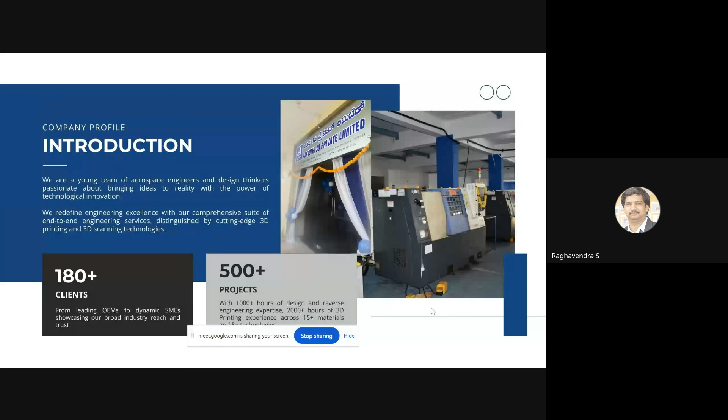But today I would like to give a brief on polymer matrix composites. Before proceeding, I would like to start with a small introduction about our venture. We are basically a team of aerospace engineers, and I started this company when I was doing my MTech by research at NITK Surathkal. This was in 2018. I started this as a proprietorship concern, and after a year, once my project was finished, I incorporated it as a private limited company.

So what we do here at Aakruthi3D is provide comprehensive end-to-end engineering services for industries. Right from conceptual design till production, we have a dedicated team of resources as well as capabilities. We have dedicated design engineers, prototyping engineers, as well as in-house 3D printers and 3D scanners. Recently we established our subsidiary company, which is the manufacturing arm of our company, where we do even conventional machining - precision CNC turning and milling. Currently we are located at Peenya industrial area.

Our client base is more than 180 plus, which includes Mercedes. We are a registered vendor for Mercedes Benz Group, SKF, ITC, and Magellan Aerospace, Unimec Aerospace, just to name a few leading OEMs as well as tier one companies. Our team has successfully completed more than 500 projects, with more than 1,000 hours of design and reverse engineering expertise. We are also working on some unique use cases in aerospace, oil and gas, like non-destructive testing.

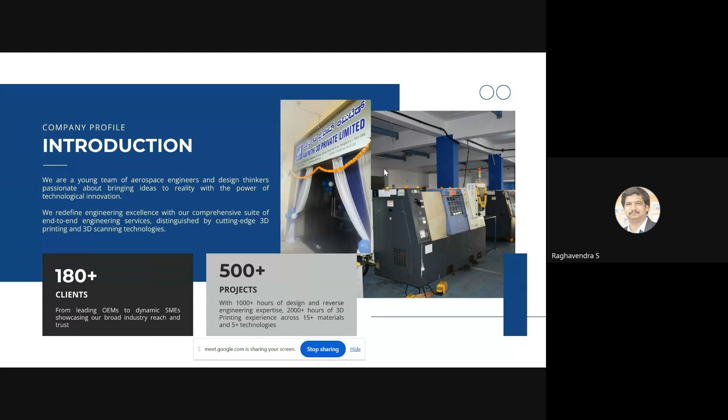Some of our key products and services, as I told you, span from conceptual design till manufacturing, we have the capabilities. Our vision is to become India's own tech giant by developing and commercializing critical indigenous technologies in the aerospace and defense sector.

I can tell you some of the R&D projects we are currently working on. We are developing a metrology grade 3D scanning technology, an indigenous 3D sand printing technology, and a micro gas turbine technology. These are three projects in our portfolio where we are putting dedicated efforts.

We have applied to government grants, and recently we have raised equity funding investment also from angel investors. So this is about us, what our team is working on, and how I have been instrumental in doing these things.

Coming to today's presentation, I'd like to give a brief roadmap of what we are going to discuss. We'll start with the introduction, then have an overview of different 3D printing technologies. Then we'll go deeper into polymer matrix composites, their applications, future research prospects and challenges, and how I'd like to address this session.

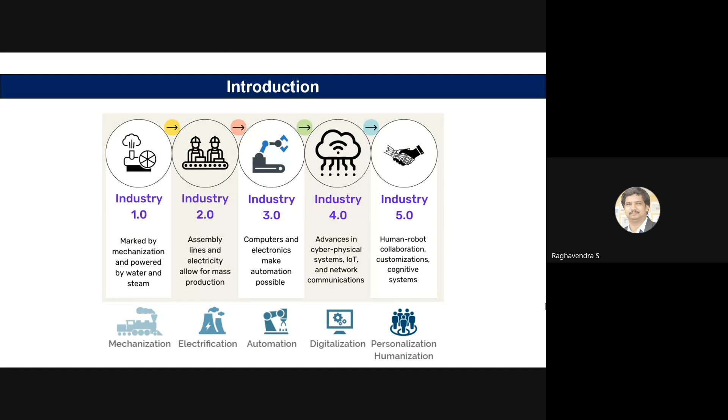So in the context of Industry 5.0, composite material will also play an important role.

The second technique is jetting, material or binder jetting. That basically serves a range of materials like ceramic, metal, plastic, wax, and sand.

Then you have powder bed fusion, which is majorly used for metal and ceramic, but it can be used for plastic also, like SLS (selective laser sintering), SLM (selective laser melting), and EBM.

And there are deposition techniques, the regular extrusion techniques, called fused deposition modeling (FDM), or its more open source name, triple F, fused filament fabrication. For live cells there is 3D bioprinting, and for paper there is sheet lamination.

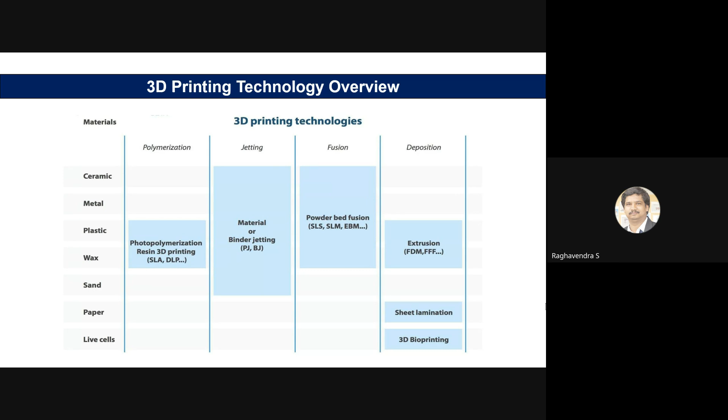So this is the technology landscape, you can call it. For different compatible materials, there are different technologies.

A brief overview - I would like to give some 3 or 4 technologies in today's session, where in the context of composite material, we'll see what are its advantages or disadvantages.

So FDM, as I told you, is now available in every nook and corner of the market. It is the most popular technique and the cheapest one, and it builds layer on layer by pouring melted filament from the extruder. You can see in the representation figure there is a nozzle, and thermoplastic filament like PLA or ABS is melted and deposited layer by layer, with movement in the build platform or the nozzle itself. That is how your 3D object is created.

So here, how do you control the quality of the parts? There are parameters like layer thickness, grid pattern, printing orientation, raster width, raster angle, and air gap. These are some of the parameters which decide the quality of the final 3D printed part.

So even after optimizing all these parameters, it may not give you a functionally working component. That is one disadvantage of FDM. Also, due to the thermal expansion of the polymer itself, whatever final printed part we are getting will have distortion in it. And based on the layer thickness, there is even compromise in surface finish.

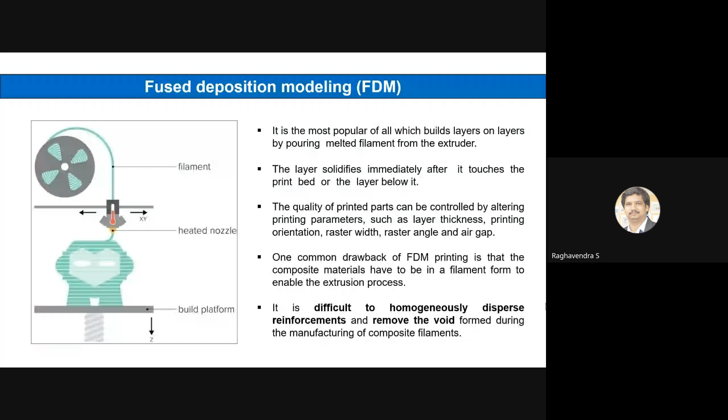So next we'll see stereolithography. In this technology, basically we use resin materials. Why this technology is popular is there is a great range of materials because of its material versatility. There are engineering grade resins like clear resin, the standard resin, durable resin, or high temperature resin, elastic resin. And if you go to medical, there are dental resins or biocompatible resins. So due to its complete range of printable materials, that material versatility, SLA is popular.

And one more thing is its surface finish. You will get the same injection molding finish in SLA as the printed condition itself. So that is the advantage of SLA.

So here what we need to understand is the chemical reactions. In FDM, we saw it is like a thermomechanical process. Whatever heating and melting process is there, if that physics is followed, you can understand the internal structure. But here, we need to understand the chemical reactions during polymerization to control the quality of the final parts.

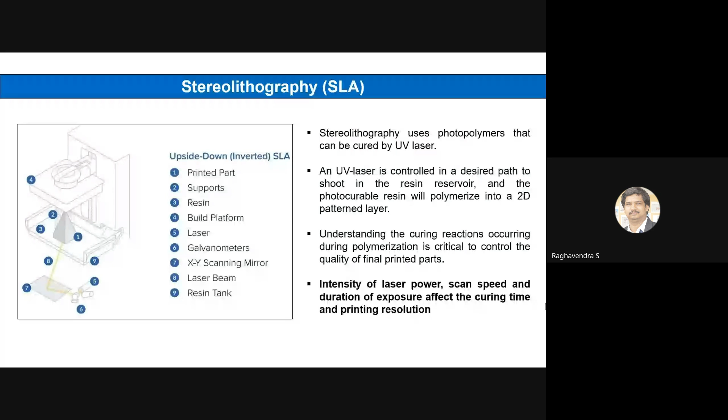Here, how we can create a composite material is we can add directly to the resin itself, like photo initiators and UV absorbers, to control that polymerization reaction, that curing reaction as I told.

So the main advantage is you'll be able to print parts with very high resolution, and since this is a nozzle-free technique, there is no problem of nozzle clogging. So this is the advantage of SLA.

Despite these advantages, there is high cost. Just to give an example of the current Formlabs ecosystem we are using, the resin itself will cost 24-25,000 per liter. So whatever trial and error you want to do, apart from your functional resin, you need to maintain the reservoir, even that should be filled. So to conduct an experiment, it's like two times the consumables you should be having. That is how expensive the system is.

And one more disadvantage is there might be possible cytotoxicity. There are some poisonous residues if it is not cured properly. So that is also one major concern.

And even in terms of handling, with FDM, since it is a mechanical process itself, you can easily operate it - there might only be melting or nozzle issues. So all those things can be handled easily. But here, since we are working with resin and chemical reactions, you need to be very careful while using these resins or different post-processing techniques. So that is the disadvantage of SLA.

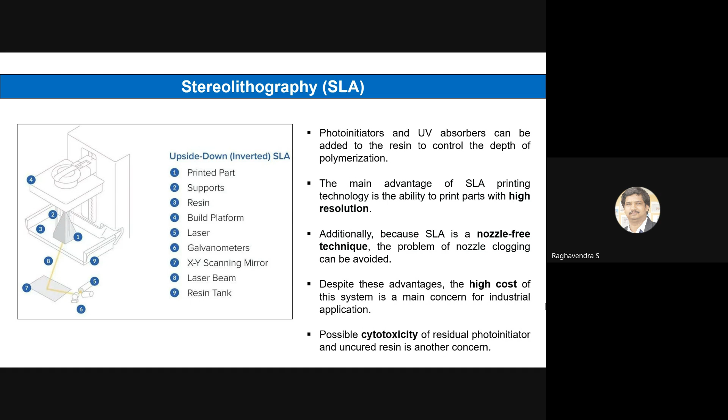The next technique is SLS, that is selective laser sintering. Here the form of material we are using is powder based processing technique, same layer by layer process only. The grain size is around 20 to 30 micron grain size powder we are using.

This high power laser beam and the powder interact in a controlled environment, which may be like an inert gas environment, and the powder fusion takes place for each layer. There is a roller which basically spreads each layer of the powdered material, and correspondingly the high power laser beam is incident on the part.

How you do the slicing for FDM, similarly here also that slicing happens. Wherever your part is there, that region itself the fusion takes place, and the remaining won't take place. This complete piston operated platform goes on lowering for every step until your final product is ready.

The major advantage of this technique is that it is a support free technique. In FDM, if you have worked, you might be fully troubled with support removal. Wherever some feature is mixed with support, it is very difficult to get that surface finish. Similarly in SLA also, there will be minute marks. Wherever you remove that support structure, that mark will be permanent. You have to paint it or do some post processing to get rid of that.

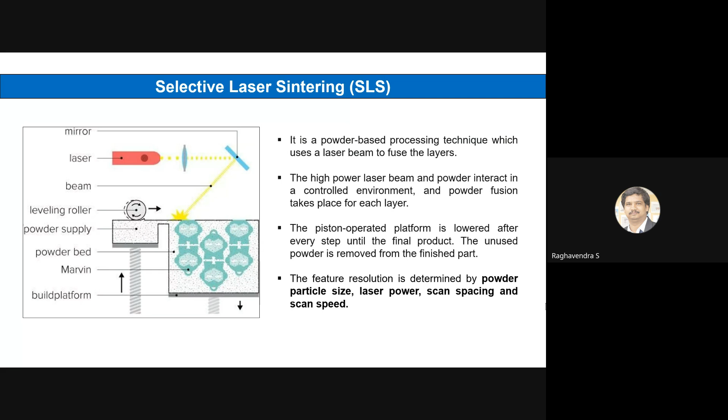The main advantages are high resolution and excellent quality. As I told you, it's a support free technique. Here the unbounded powder itself will act like a support.

Some drawbacks are that this is a time consuming process. Again, it is a very costly process. As I told you, in SLA you need to maintain a reservoir of your complete resin, so that is twice the consumables. But here, the complete tank has to be maintained, with powder present, so that is still costlier than SLA.

And even after doing all these things, there are porosity issues. Even today, if you search, there is research happening on how to reduce this porosity, how to reduce crack formation, how to make the grain structure very fine. All this research is still underway, and we have not yet got standardized parameters, or optimal parameters for each material.

It's different in SLA and FDM. There, the machine maker itself gives the guidelines, like what should be the layer thickness, or what should be your infill density. But in powder bed fusion, it is not like that. All the printing parameters you only have to arrive at by yourself.

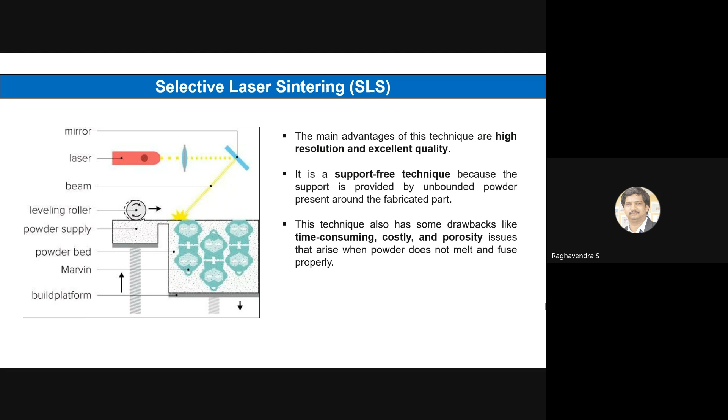Even NASA is working on this, ISRO is working on this. If you can get a very printable, high performance super alloy, that's a game changer for all industries. Maybe what SpaceX achieves today in space, or Apple, or any of these giant companies, it is because of these printable high performance super alloys only. So I think there is a great scope for research in this area.

So now let's just compare the three techniques we discussed: what are their advantages and disadvantages.

By FDM, it's a low cost consumer machine, but the feature details show there is low accuracy, limited design compatibility, and if you want semi-functional components, there is high cost involved and high performance materials are needed. So it is best suited for low cost rapid prototyping and basic proof of concept models, with only select end-use parts requiring high-end industrial machines and materials. The compatible materials are standard thermoplastics like ABS, PLA, and various blends on consumer level machines.

In SLA, there is great value because of its high accuracy, smooth surface finish, and a range of functional materials. One disadvantage is it is sensitive to long exposure to UV light. Some applications are functional prototyping like patterns, molds, tooling, dental applications, jewelry prototyping, and casting. As mentioned earlier, there are varieties of resins available: engineering grade resins, medical grade resins, casting resins, biocompatible resins, and the list goes on.

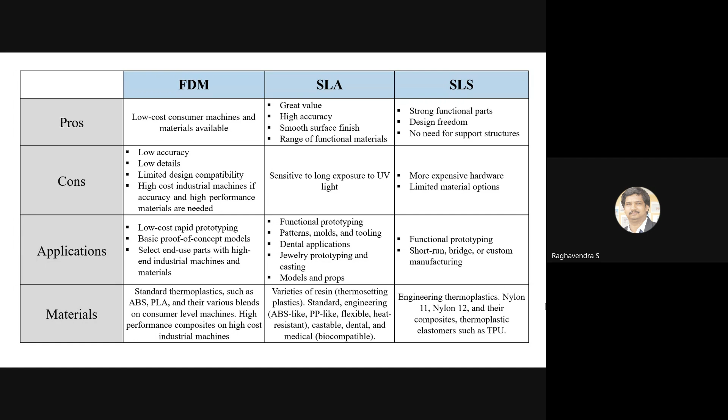One more technology I want to briefly introduce is relevant to composite printing technologies, like 3D plotting or direct write technique. This is not a very popular technology, but for composites, whoever has worked with them might have heard about it. It uses the same extrusion principle, where you're extruding a viscous material from a pressurized syringe. This is most popularly used in biocompatible material printing.

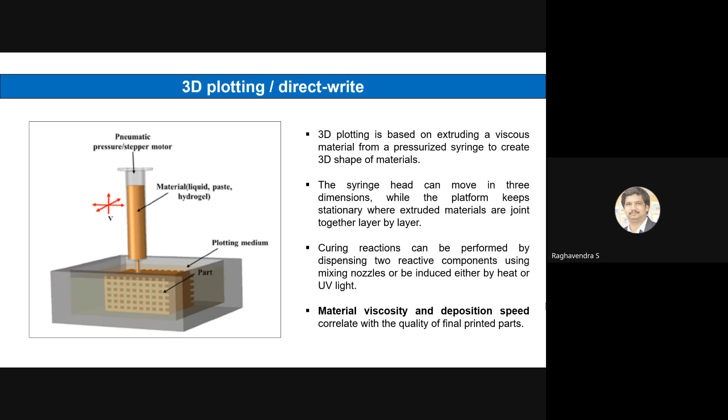You can see in the figure there is a syringe head that can move in 3 dimensions, whereas the platform stays stationary, and extruded materials are joined together layer by layer. Here too, chemical reactions or curing reactions happen, which can be performed by dispensing reactive components using mixing nozzles, or induced by heat or UV light. The quality of the final printed parts is decided by two parameters: material viscosity and deposition speed.

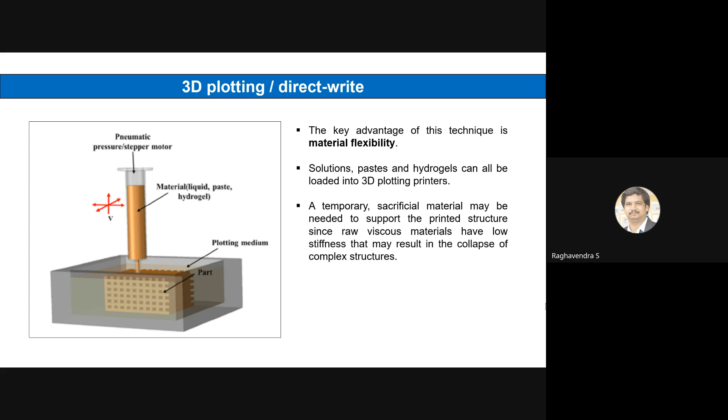One advantage here is material flexibility in terms of composites you can create. Solutions, pastes, and hydrogels can all be loaded into these 3D plotting printers. In today's context, this is quite relevant.

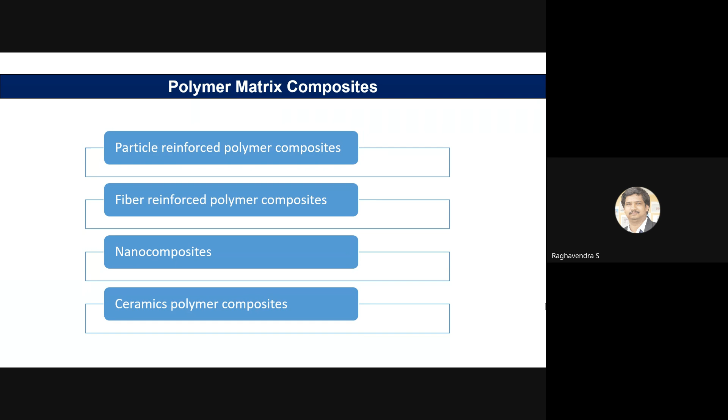Now we'll go a little deeper into polymer matrix composites. I have listed some of the most popular techniques: particle reinforcement, fiber reinforcement, nanomaterial reinforcement, and ceramic polymer composites. We'll go through some of the latest research happening in these 4 areas, look at applications, and try to figure out future trends and what we can focus our research on.

The main reason we prepare these composites is we want some enhancement in properties, like mechanical, electrical, or thermal property, as per a specific application—that is our end goal. With that in mind, what particles can we reinforce, and whether it is 3D printable or not.

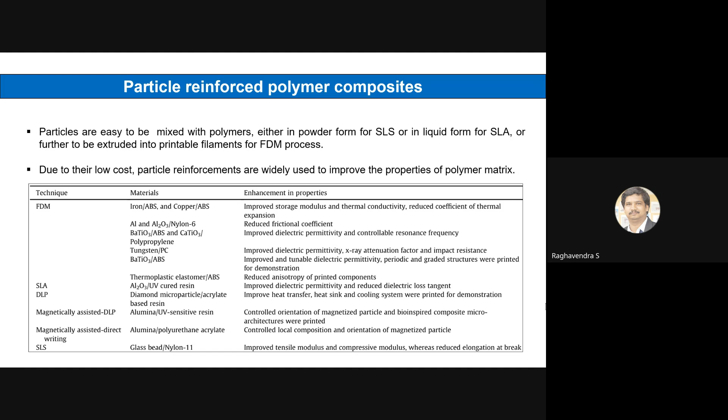Similarly in SLA, as I told you, directly to the resin itself you can add some particles like aluminum oxide slash UV cured resin. Here also there is improvement in dielectric permittivity, and similar for DLP. I'll show some case examples after this where you'll still be able to understand this. There are some magnetically assisted DLP processes developed, which we'll look at in the coming slides, showing how you can control the alignment of the particles you are reinforcing so that you get a highly isotropic part. That is the focus we want to achieve.

So this is one example. One of the researchers, I think in 2016, did this study: they 3D printed a heat sink using the first picture A, acrylate resin, and the second one B, a 30% weight by volume composite material with micro diamond particles added to acrylate resin. What enhancement did they get? You can see in pictures C and D. If you heat both components at the same temperature for 10 minutes at 100 degrees Celsius, you can see the difference - 75, 57, 44 degrees, that gradient is there. But with the composite material, 82, 64 and 52 degrees Celsius - there is improved heat transfer rate by addition of diamond particles. This is one classic example.

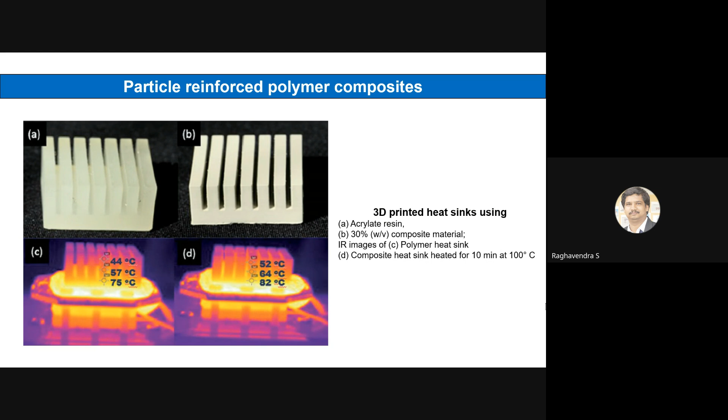This is one more example, where barium titanate is infused with ABS polymer, and you can see the relative permittivity change, that is epsilon prime. With the normal structure it was 2.57, and by adding 50% barium titanate it has gone to 4.95, that is almost double. If you further explore the study and increase this percentage to 70%, the property enhancement is almost 240%. So the property enhancement we are telling you about is so significant - that is why this area is so promising.

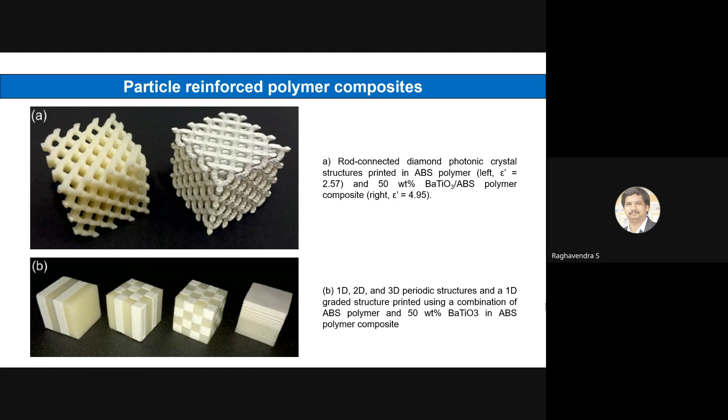And in example B, you can see they have generated different structures like 1D, 2D, 3D periodic structures using the same composition.

So this was the technique I was talking about in the previous slide, where one of the researchers has developed this novel 3D printing platform. It is a magnetically assisted 3D printing platform.

Left side picture, that's picture A, where you can see you can create heterogeneous composites here. Some of the parts are mentioned here. You can see that green colored one, those are the dispensers, and the blue big one looks like a nozzle, big nozzle, that's a mixing unit. Third one, the bed, that's a movable head and table. Fourth is the magnet, and fifth is the curing unit.

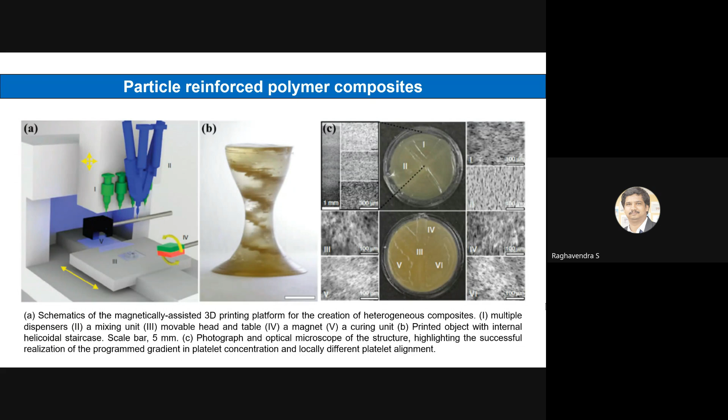You can see a printed object with the internal helicoidal staircase, and we can see some of its optical microscope pictures as well. The main thing to observe here is void formation, how much we are able to reduce void formation using this magnetic field, because during the 3D printing process you apply a magnetic field so that whatever particles you are adding get aligned in the direction achieved. So that is one novel feature of this.

So with this, I think we can go to fiber reinforcement. Earlier we discussed particle reinforcement. This is also one more method where you can significantly enhance the properties of PMCs.

Common 3D printing technologies in fiber reinforcement are FDM and direct write, that's like the 3D plotter we saw, which is relevant for this fiber reinforcement. Powder based techniques are not ideal for creating fiber reinforced materials, because you cannot create a smooth layer of powder and fiber mixture, so that's difficult. That's why powder based technologies are ruled out. Only FDM and direct write techniques are there.

In FDM processing, the pellets and fibers are first mixed in a blender and then delivered to the extruder to be fabricated into filaments. You can have a separate second extrusion process as well, just to make sure there is homogeneous distribution of fibers.

In direct writing processing, there is a polymer paste and the fibers, they are mixed first and then directly extruded. So the technique is like this.

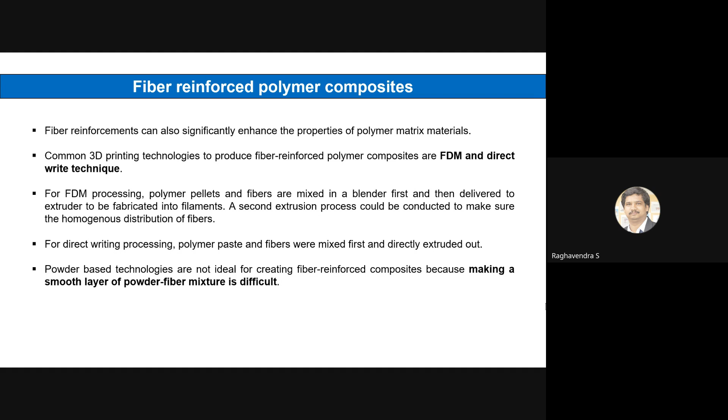Here you can see there is enhancement of properties. If you are aware of commercial printers, I'd like to give a small overview here. There is Markforged printer, which can print materials like Onyx, whose properties are equivalent to that of aluminum itself. That's a composite material which is very lightweight, but which will give strength as that of an aluminum alloy. Such commercial based printers are able to achieve this.

But here the challenge is short fiber versus continuous fiber. Most of the research is focused on short fibers. For example, in the FDM technique, short glass fiber is added to ABS, and short carbon fiber is added to ABS. You can see the different loading percentages and how much corresponding improvement there is. Almost 194% is the maximum improvement you can see. And even as low as 5% loading, you are able to get some 24% improvement.

Similarly for direct write, short carbon fiber and silicon carbide whisker with epoxy, with 35% weight, 127% improvement is there. This is one more comparison showing how different it is in terms of short fiber versus continuous carbon fiber. If you see the last column, continuous carbon fiber slash nylon and continuous carbon fiber slash PLA, just 34.5% volume and 6.6% volume, you can see the improvement is 446% and 335%. That much improvement we are able to get with continuous carbon fiber.

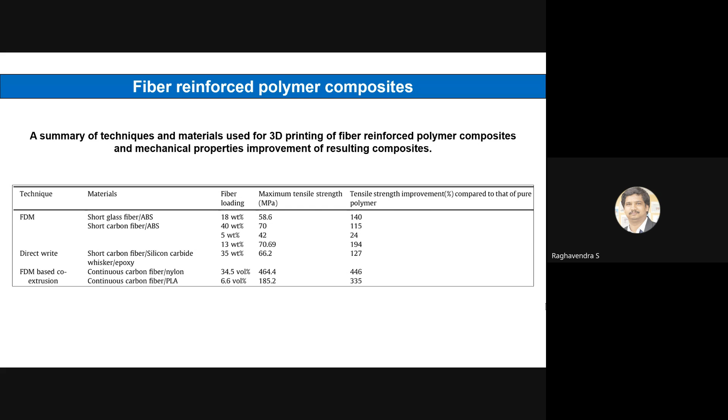I want to highlight one more point. We saw that continuous carbon fiber has almost 300-400% improvement. But even then, you will be knowing the rule of mixture we use for composite material. Whatever theoretical value you get by rule of mixture, it is not matching with this 446% or 335%. It is still lower than that theoretical value itself. So there is a difference between experimental and theoretical values.

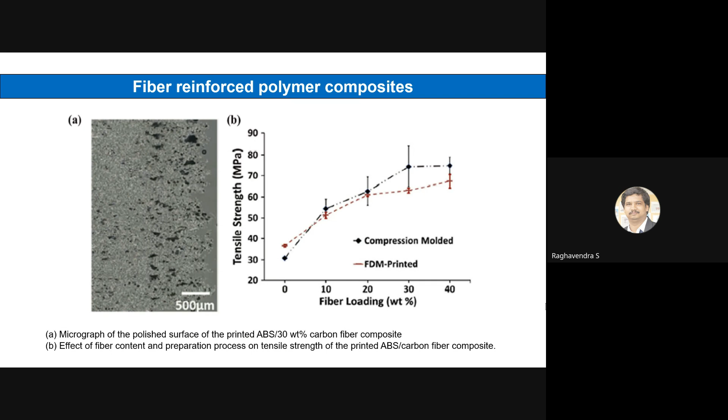Here is one example where on the left hand side you can see the micrograph of the polished surface. What we need to observe is the void formation. If I quantify this, maybe around 10 to 20% void formation is there. But if you look at its performance, tensile strength versus fiber loading, it is compared with one more established technique, compression molding, and FDM 3D printing. Both are compared, and you can see the properties are almost matching. So there is void formation, but still you are able to match compression molding. How is it possible? It is only because when you are doing the 3D printing itself, all those fibers get aligned in your loading direction. That is the basic reason why you are able to see the values closely matching FDM 3D printing and compression molding.

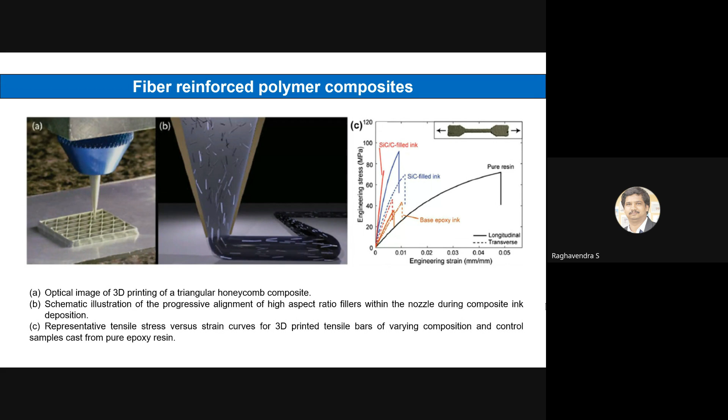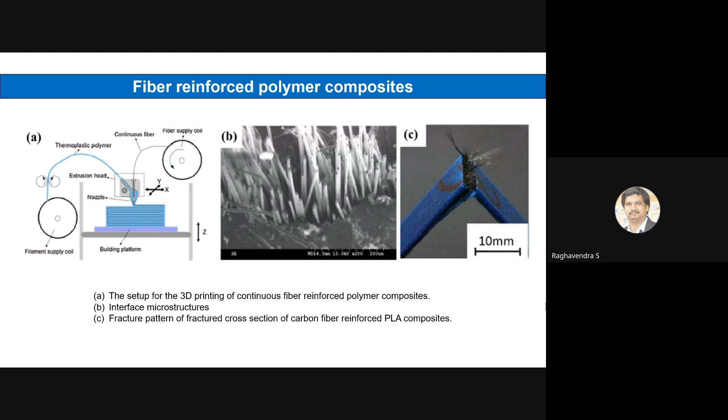Now I think we can go to nanocomposites. Here the difference is, we saw particle and fiber, now we are adding nanomaterials like carbon nanotube, graphene, graphite, ceramic, and metal nanoparticles. Here the challenge is, if you study graphene, it's a self-lubricating material, so how do you combine it with your regular polymers and achieve homogeneous dispersion? That's a challenge. Even my work is concentrated on this itself. We are trying to add graphene and graphene oxide with the Invar composite, using a ball milling process to achieve that. But still, how do you ensure homogeneous dispersion, and how do you make that 3D printable? Those are the areas where we are working. Here the main aim is to create high performance functional composites or high performance super alloys.

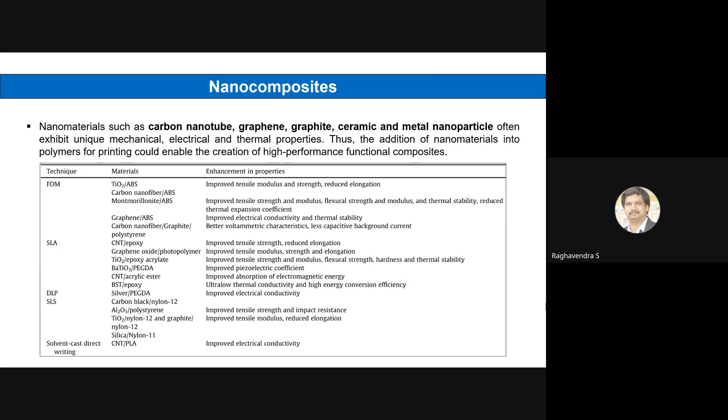Similarly in terms of SLA, you can see some photopolymer added with CNT, graphene oxide, and acrylic ester and CNT, where you can get improved piezoelectric coefficient, tensile strength, modulus, and flexural strength. Similarly in DLP and SLS.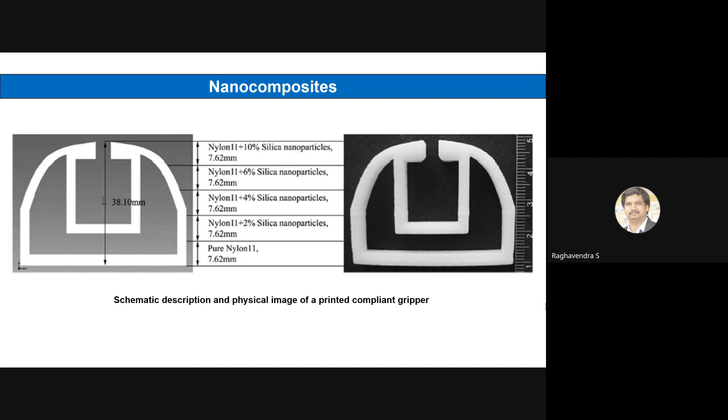The last example is ceramic polymer composites. Here also, there are many ceramic particles we can add, compatible with FDM and SLA techniques.

Or there are some special technologies developed specifically for ceramic polymer composites. Since I don't have much exposure in ceramics, I thought I'll just give this comparison.

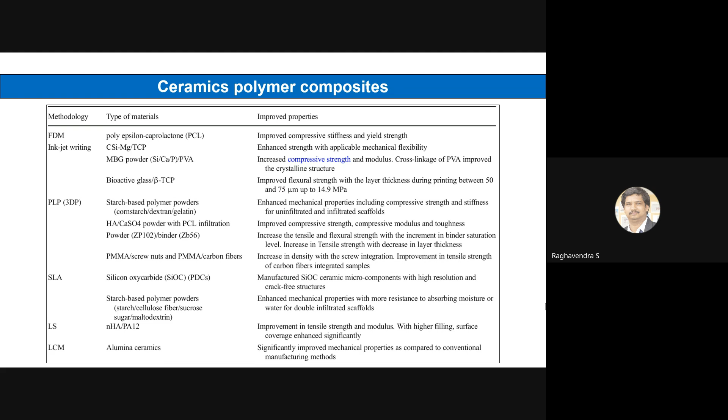Now we can go to some of the applications of PMCs, where it can actually benefit. This is where it gets interesting.

Whatever we are seeing now, maybe in movies, like the fictional part of 3D printing, you can print a complete human body itself, or you can print cells, you can print textures like tissues. All this comes in this application part.

Or you can print the complete drone electronics. Imagine now you are printing the drone body, but the electronics also, if you can print it during that process itself - that's structural electronics I'm talking about.

Then I think there's no limit actually, so much potential it holds. So those applications I think we can see in these slides.

The first thing is aerospace and automotive, as I was telling about the drone case itself. Here you can see two profiles: a blade profile and a propeller airfoil profile, using glass fiber composite and carbon fiber composite.

Just a cross section to establish the feasibility of printing, you can say. You can see in this that C, D, G, and H.

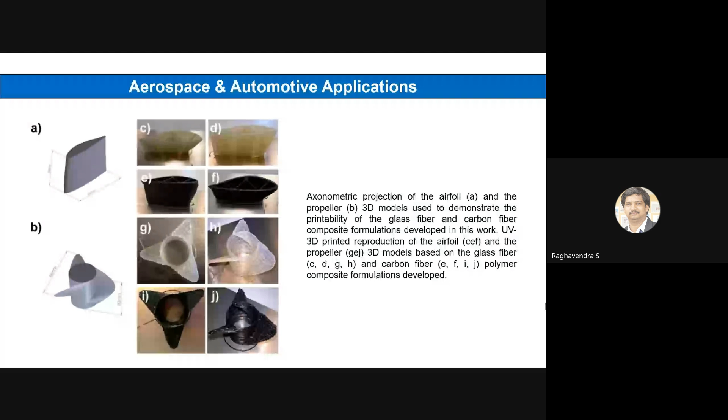Coming to biomedical applications, there are naturally derived polymers that are standard used, like gelatin, alginate, and collagen. There are also synthetic polymers, like PEG, that is polyethylene glycol, and PLGA, that is polylactic co-glycolic acid, and PVA, that is polyvinyl alcohol.

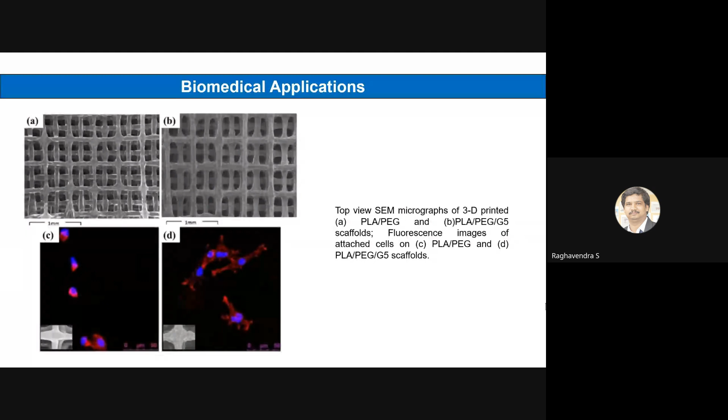But in biofabrication, you can see the internal microstructure, how uniform or crystalline the structure we are able to obtain using this. For PLA/PEG and PLA/PEG/G5 scaffolds, you can see the fluorescence images. The scaffold functionality requires us to replicate the inside microstructure. Once that is done, the functionality is taken care of. That is what we are trying to look at here.

This is one example of a bionic ear, where you can actually print cells and tissues. There is also a recently 3D printed heart you might have heard of, but it's a functional heart actually, not like a replica or something.

Even medical models using binder jet, you might have seen, maybe 5-10 years back, used to train doctors as mock anatomical models. Now if you can print an actual heart itself, a functional heart, imagine how much big problems can be solved in terms of heart transplant or organ transplant. So many areas can be overcome using these applications.

In the image you can see the first A image shows the CAD drawing. You need to start with the design, then come the materials you are going to use - biological component, structural component, electronic component. This is where different technologies serve for different materials, showing a multi-material approach and multi-technology approach as well.

To make a functional ear, you need the biological component, that is chondrocytes used here, and the structural component is silicone, embedded with the electronic component, that is AgNP infused silicone, to form this bionic ear. Finally, you can see the 3D printer used for this printing, and the 3D printed bionic ear.

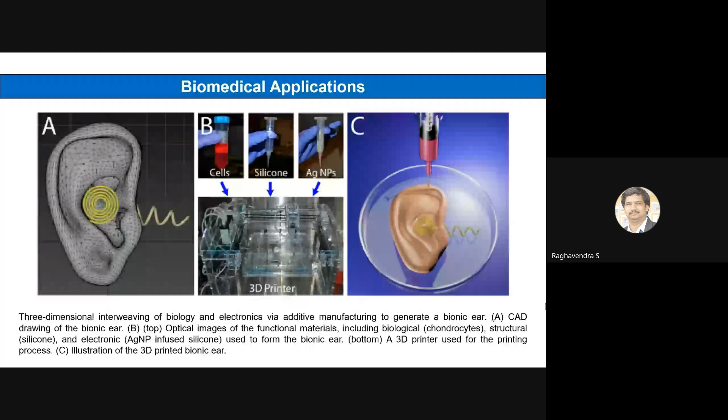This is in electronic applications - the 3D printed carbon black/PCL composite for piezo-resistive sensors, capacitive sensors, and the macro image of printed sensor pads, where it is not just the structural component. Maybe you want to embed the functionality in that structure itself. Whether this can be explored is one application of electronics.

One example - nowadays if you're launching a satellite, there is so much structural weight, dead weight actually, which forms the majority of the payload. But what if, instead of deploying separate solar panels, you can integrate some form of energy storage or energy conversion device in the body itself? That will reduce so much dead weight - no need for carrying batteries separately. That is one application, using only 3D printable functional structural electronic parts you can explore.

There is one more significant area - research going on for 3D printed solid state batteries. The current batteries, how they operate and how outside environmental factors affect them - so many electric vehicle accidents you might have seen. Why? Because whatever conditions were in the west, they replicated that exact design here, but that ambient condition and this ambient condition is different. That's why so many electric bike explosions you might have seen.

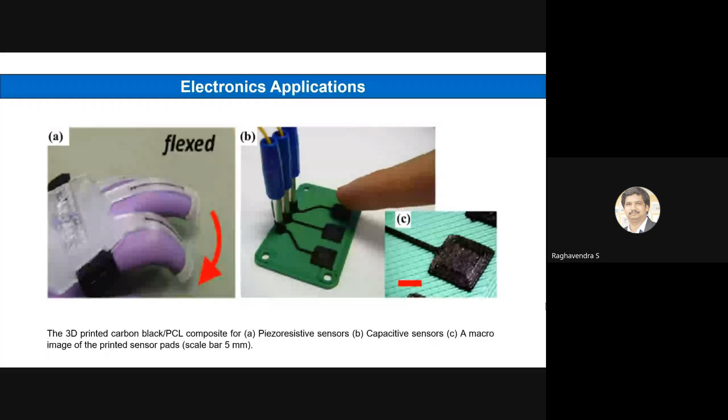So a functional 3D printed solid state battery, you can find it out. This is the future we are going towards, in Industry 5.0, where all the fields and technologies are merging to make a better future in aerospace, automotive, biomedical, and electronics. Because of advancement in these applications, we kind of reverse engineer and need to work on the material and feasible technologies. This is not just in software, artificial intelligence, or big data, but even in mechanical and hardware, because finally both are correlated. So we also need to go in that path.

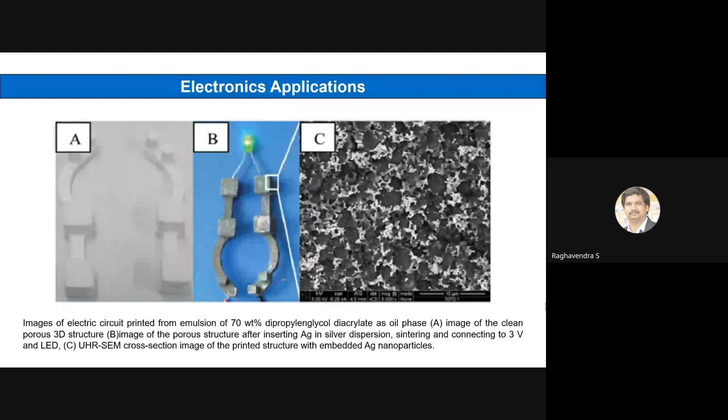So I think with this, I hope you got a fair idea of the different PMCs, the areas where research is happening, and their different applications. Now I think we can talk about the research prospects and challenges. This is relevant to our fields, where we need to introspect and come up with research focus areas we can think about, and come up with some project plan or something tangible to contribute in these areas. I think we can explore this.

So, as we told you, there are recent developments in additive manufacturing that have enabled researchers to produce products with customized and better mechanical properties. This is basically due to demand from industry, from aerospace, biomedical, electronics, and semiconductors. Because of this, we are looking at producing high strength and lightweight products, and PMCs consume much attention in the modern world. These products possess brilliant mechanical properties, durability, as well as other thermoelectrical properties.

However, the disadvantage here is that the addition of fillers is limited to a specific amount, called a threshold point. After that, the filler particles start increasing void formation, which leads to reduction of mechanical properties. Sometimes these physical properties, the particle size, don't allow the printers to extrude properly, and they reduce the bonding forces between the two materials. That will again promote void formation and affect the surface finish of the product.

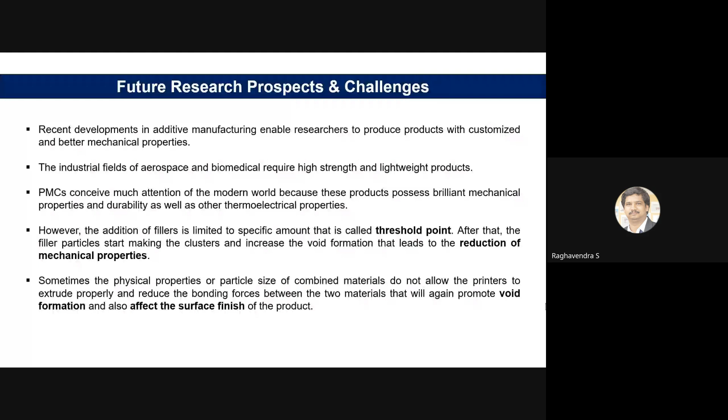So I think whenever we develop a composite material, this is what we need to take care of - how do you reduce this void formation, and how do you create that strong interfacial bonding? If we take care of these two, then automatically we can achieve whatever desired properties we are targeting for any specific application. So these two points we need to work on.

These following limitations need to be overcome, and I'm giving 3 P's here. The first P is printable materials. As I told you, all the big aerospace and automotive companies are on the lookout for this - they want some high performance printable super alloy. There are standard methodologies, like the alloy by design methodology. If you can come up with compositions that are 3D printable, where you can get the optimum printing parameters set, then all industries will welcome this move and it will be a game changer. We need to work on synthesizing matrix materials with special properties, new reinforcement, and new mixing composition. This is critical to increase the versatility of composites printing technology.

And one more area we want to see is sustainability. As you know, 3D printing is aligned with our SDG goals, because we are reducing the environmental footprint.

Since we are working on, in principle, a zero wastage process—it's a toolless process—so it aligns with the sustainable development goals. We need to develop more sustainable materials to reduce material cost and environmental impact.

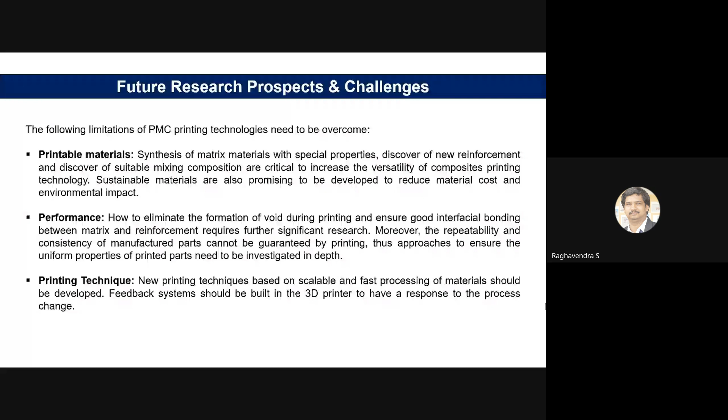So there is significant research that can happen on the feedback system built into the 3D printer. With this, I think these are the three P's where we can introspect on what we are currently working on, and what resources are available to come up with better printable materials, better performance, and better self-aware, in-situ monitoring 3D printing systems to further enhance this field. These are some of the major sources I have referred to.

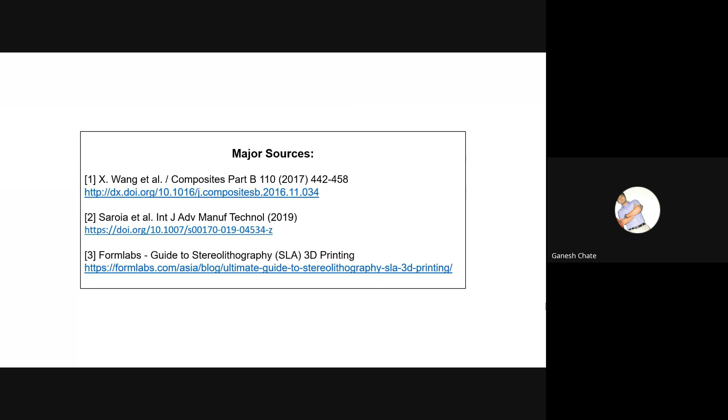Sir, there is one question in the chat box by Vishnupant Misale. Shall I read it? Yes, sir. Actually, I'm looking at it, I want to know more about... Yeah, Vishnupant, you can talk. Not a problem.

I think the question is that FDM technology is very commonly used for prototypes. Is it possible to use FDM in structural or functional applications?

This is where that particle reinforcement I spoke about comes in. We all have access to FDM 3D printers, but what we can do more than the normal low resolution prototypes, that is where this field gets interesting, where you can add particle reinforcement. You take normal PLA or ABS pellets, try to extrude, and add this material as I told for FDM. You can add iron particles, copper particles. Using that, there is a reduction in coefficient of thermal expansion, so there is no thermal distortion from your FDM parts, that is removed. And if you add TPE, thermoplastic elastomer, that will reduce your anisotropy. These two are the biggest drawbacks of FDM, so if you can take care of that using composite material, then FDM can be treated like your LPBF or SLS technique. I think this answers that question.